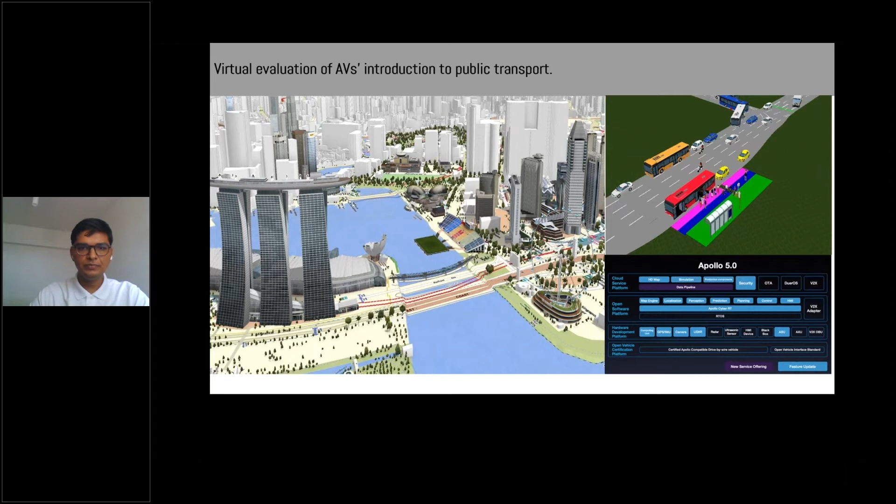The contents of today's presentation will be a brief overview, followed by the research project that I was working on, and then I would talk about the behavior modeling in Vissim, followed by the challenges or requirements for behavior modeling for AVs in Vissim. Then I would talk about the AV behavior with Apollo, how it can be modeled, and what changes we have inculcated in Vissim.

Then I would talk about the proposed design, the details of which I will cover later, followed by results. And then I would give you a future scope of how this research can be extended. So first things first, introduction, a broad view.

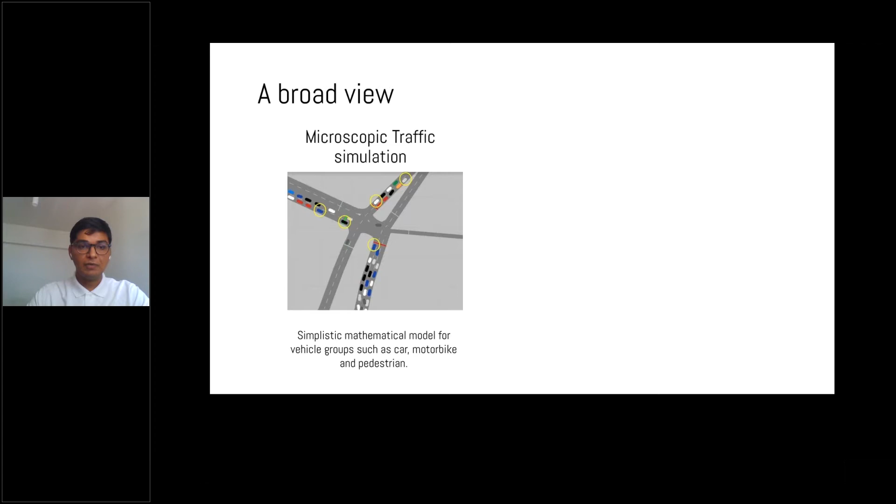Microscopic traffic simulation has a simplistic mathematical model for different vehicle groups such as car, motorbike, and pedestrian. Along with these models for different vehicle groups, it is possible to customize the models for individual vehicles in the simulation. While such modeling is observed in groups, it's also possible individually.

AV simulation, on the other hand, follows complex, detail-rich, modular mathematical models. It uses a modular approach wherein certain modules are handled differently and modeled individually, and they work together as a system.

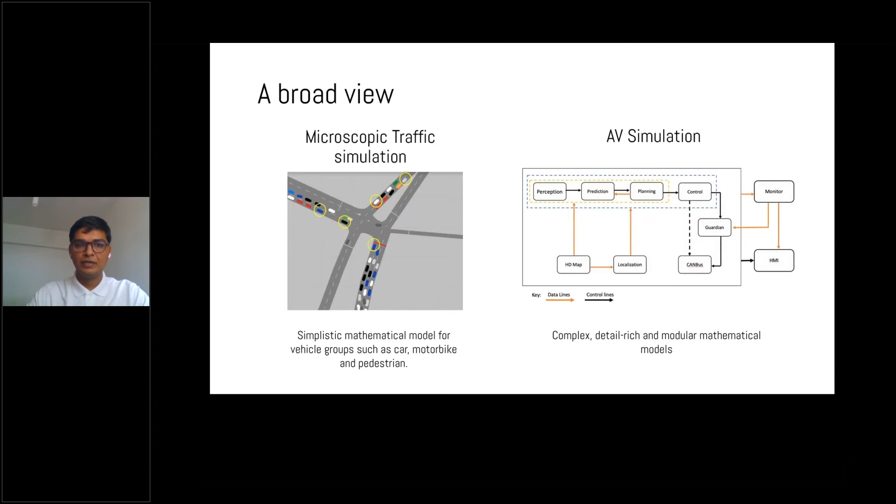So we can see that microscopic traffic simulation and AV simulation model vehicles in a different way. Both can learn a few things from each other. Traffic simulation can assist AV simulation in scenario generation and realistic traffic. Predominantly, AV simulation relies on scenario generation based on certain mathematical equations or from experience. Traffic simulation can assist AV simulation in detecting scenarios which are not traditionally detected from experience or from certain mathematical models.

As I've mentioned earlier, traffic simulation uses simplistic mathematical models, but implementation of AV behavior in traffic simulation can be a challenge. At this point, it's fair to say that traffic simulation can learn from AV simulation about AV behavior. So certain models, either offline or online depending on how you implement them, can enrich traffic simulation when AV behavior, as a lesson learned from AV simulation, is implemented.

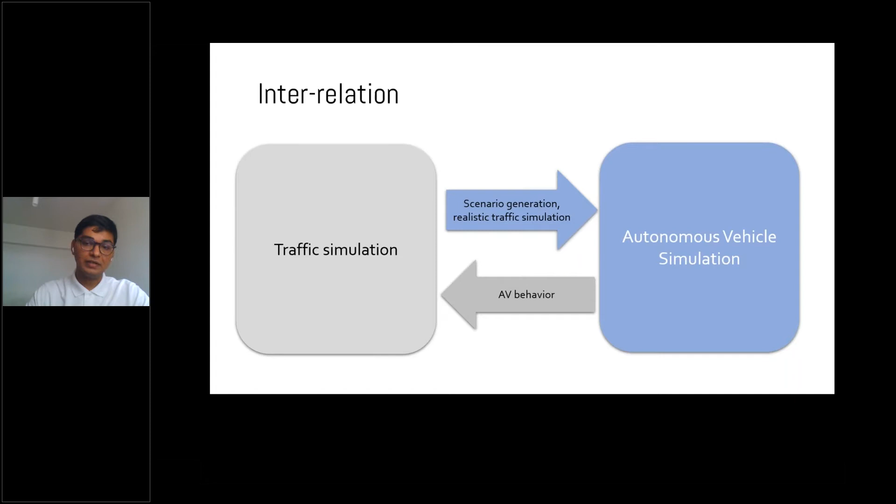The next thing I'm going to talk about is the research project that I was working on. The first part of my research was modeling highly accurate perception and autonomous behavior of the vehicle by using multiple third-party software which are predominantly capable of AV simulation. So the idea was to replicate realistic AV behavior.

Along with the AV behavior, the idea was to replicate realistic traffic behavior, because most of our predominant AV simulation tools do not have realistic traffic. And it can be challenging, depending on which tool you are using.

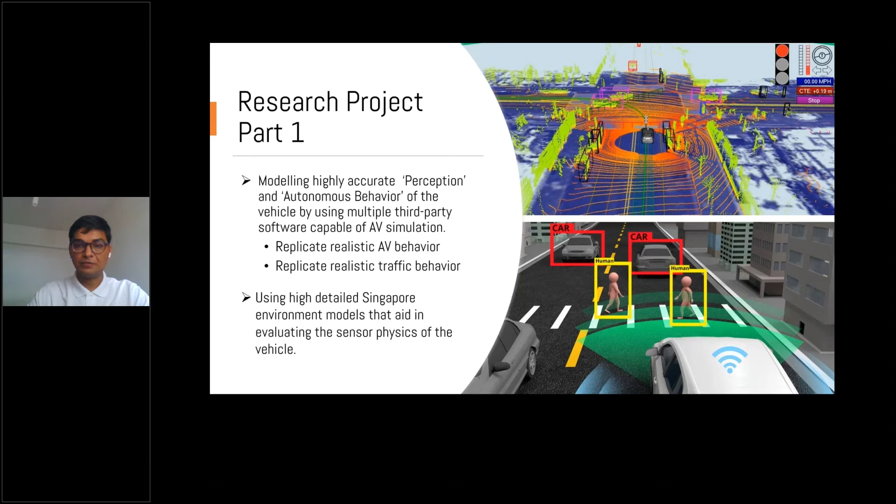Another part was to also concentrate on the environment models that you use in your virtual testing tools. So since our area of interest was in Singapore, we used Singapore environment models, which aid in evaluating sensor physics of the vehicle. The second part of our project was to redesign parking areas and MRT stations. So MRT stations refer to the metro stations, to maximize AV loading or unloading and commuter throughput.

So the idea was, let's say in future, if AVs are deployed for public transport, we want to see how we can integrate the AVs into the existing public transport. So the idea was to propose various bus stop designs. So how do we do that? It is to actually modify the existing bus stops. So the design would include a dedicated stopping point for AVs. So we compared certain advantages and disadvantages of these designs.

Along with that, we implemented these designs in a microscopic traffic simulation model to evaluate, maybe not just to compare, which was the initial idea. The next idea was to evaluate how these designs can benefit if AV is realistic enough. So this part of the project is where I try to understand AV behavior and also the traffic behavior. So this is where I decided to use Vissim. And yes, I'm going to talk about how the behavior is modeled in Vissim before I talk about the AV behavior with Apollo.

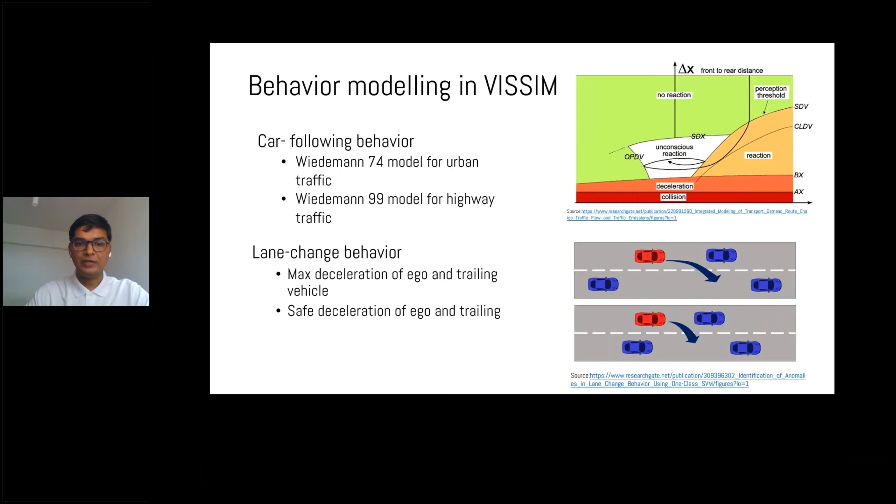And the other behavior is the lane change behavior, which predominantly relies on maximum deceleration of the self vehicle or ego, and the trailing vehicle. Along with the maximum deceleration, safe deceleration is another value which is observed to be quite sensitive when modeling lane change behavior for the ego and the trailing as well. Now that it's clear how to understand the vehicle behavior in Vissim, it's also important to understand how AV behavior can be adjusted to this lane change and car following model in Vissim.

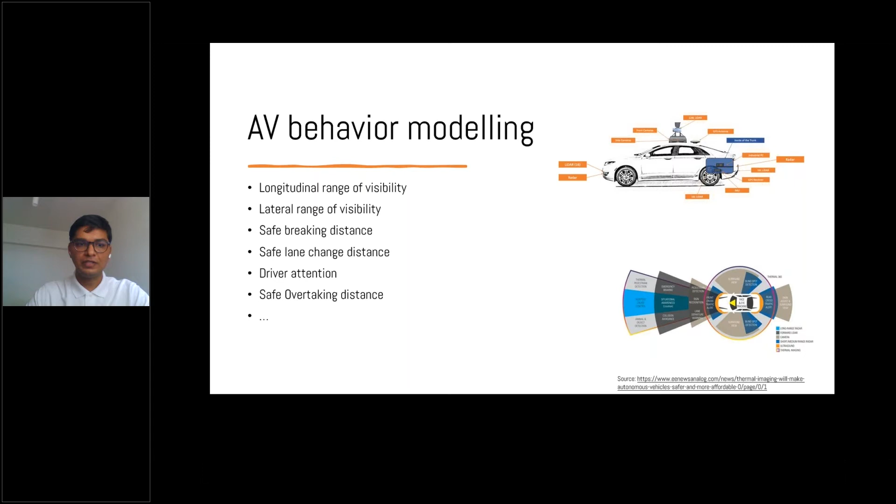For that, we need to understand certain parameters such as longitudinal range of visibility, lateral range of visibility, safe braking distance, safe lane change distance, driver attention, which can be a probability number, safe overtaking distance, so on and so forth. So when all these values are translated for an AV, it depends on what sensor setup the AV is using. The AV has different sensors installed, and each sensor comes with a range. And it's also up to the AV to detect an object, a static or a dynamic object, and react according to that. So all these parameters, when translated to AV, depend on the range of the sensor setup, longitudinal, rear, and lateral, and also the efficiency of the AD stack. How long would it take to detect an object, translate, and then actually react? So it depends on the AD stack.

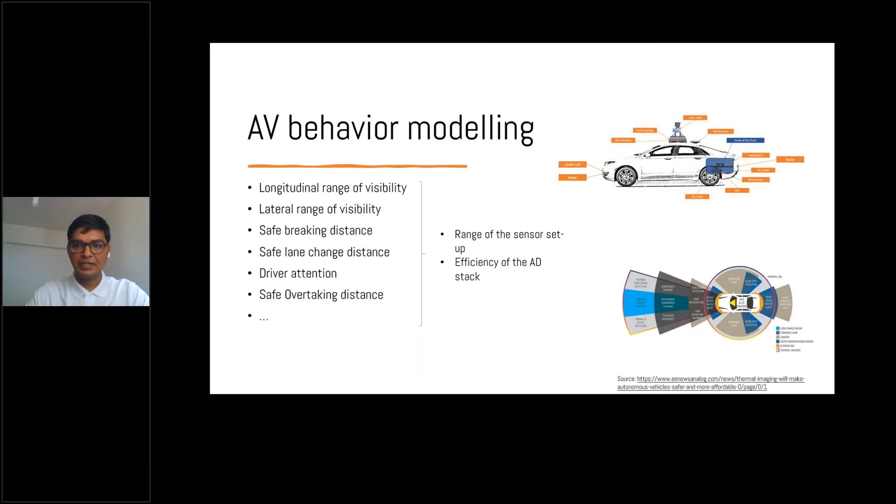And we ran a few sets of experiments to see if these values are followed by the Apollo AV, and certain values such as standstill distance, headway time, and following variation were observed to be slightly different, while certain values such as negative following threshold, positive following threshold, and speed dependency of oscillation were not found to be very sensitive. At least when we changed the values, there was not a significant difference in the Apollo AV, so we did not test further. And certain other values such as standstill acceleration were found to be higher. At least this was the value that we were using for our AV.

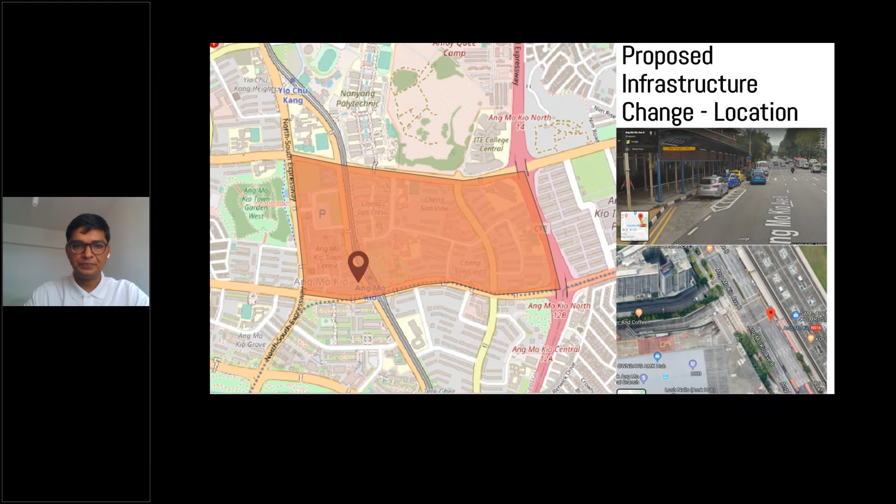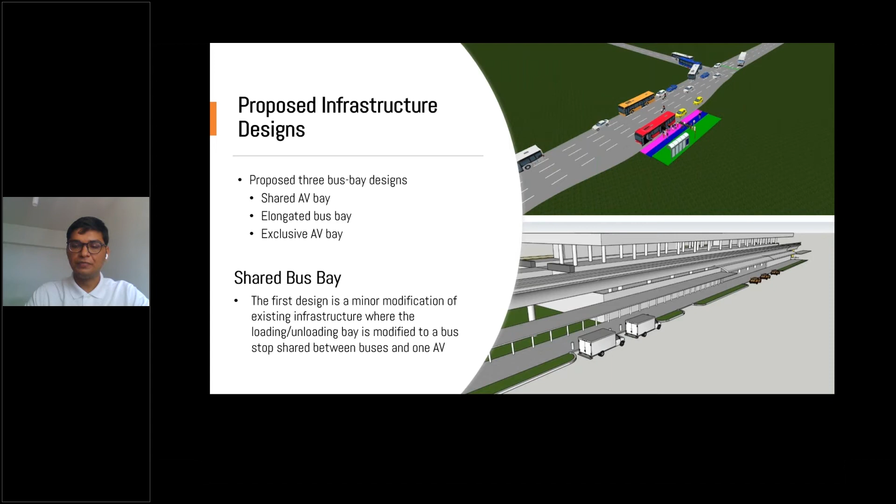So in Vissim, we model our AV as a car, since Vissim does not consider certain parameters such as weight and dynamics. So we used car as our proposed AV, and we modified the loading bay into a bus stop. On the bottom, you can see there's a loading bay. So we modified that into a bus stop and allocated a designated stopping point for AV. Here is the simulation render of the shared AV bay or shared bus bay. You can see this stopping point for AV where people would get down and then get in. And the AV, the car in yellow color, includes the calibrated Apollo parameters.

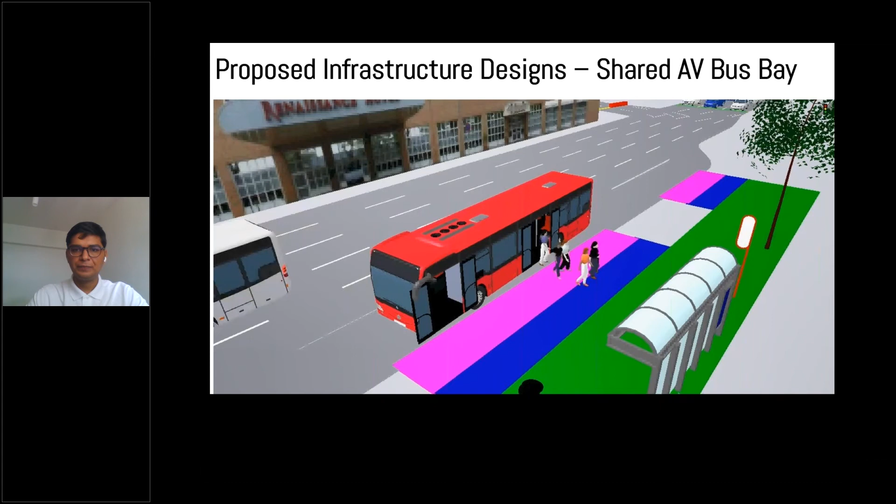Another design is an elongated bus bay. In Singapore, at the bus stops where there is higher traffic, there would be a double bus bay. Our idea was to extend the existing double bus bay and include a dedicated stopping point for AVs. So as you can see, the AV has yellow color and it has a dedicated stopping point in the middle of both the bus stopping points.

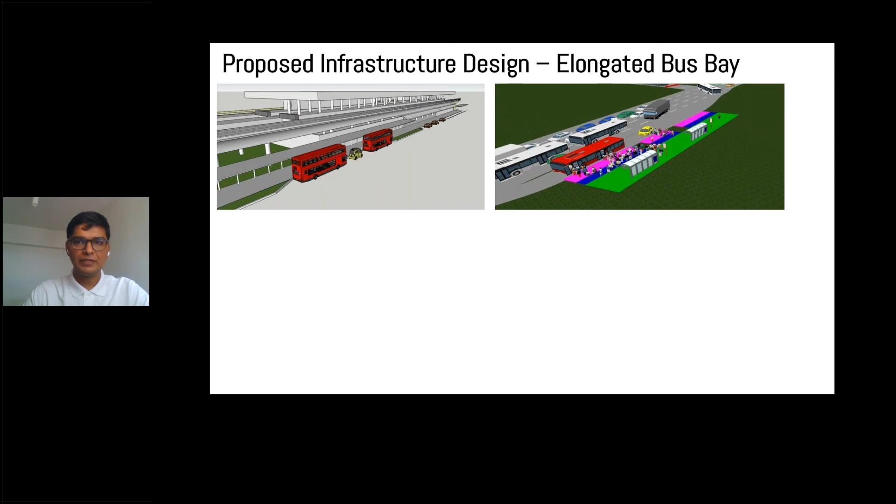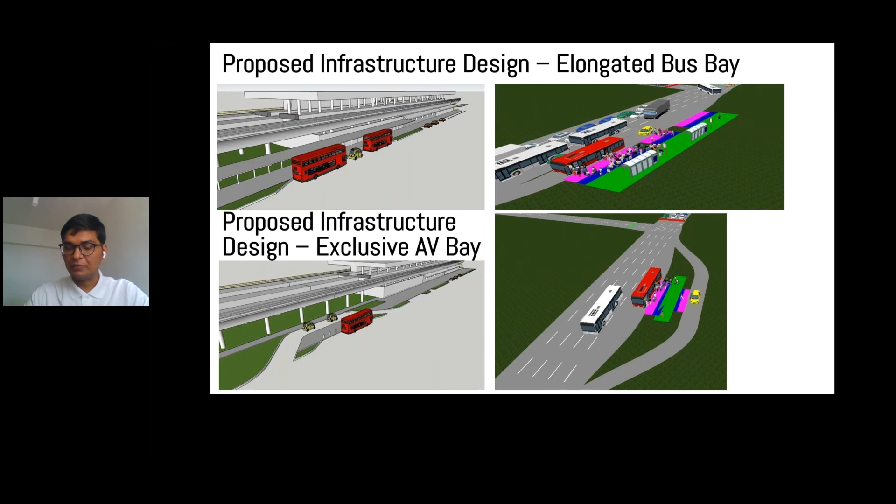That's one idea. Another idea is to have an exclusive AV bay. How does that work? The idea was to have a stopping point physically located behind the bus bay. And this is how it would look like. So there would be a bus, and then there would be an AV stopping point physically located behind. Some simulation render can help you visualize what I am trying to say. So there would be a bus stopping point, and behind that would be an AV stopping point.

So the next step would be the results. How did we try to evaluate? The measures of effectiveness that we used for this research were travel time and queue length. We calculated the travel time for different designs, and also for AVs and cars and other vehicles separately. We realized that the travel time for AVs is different for different designs.

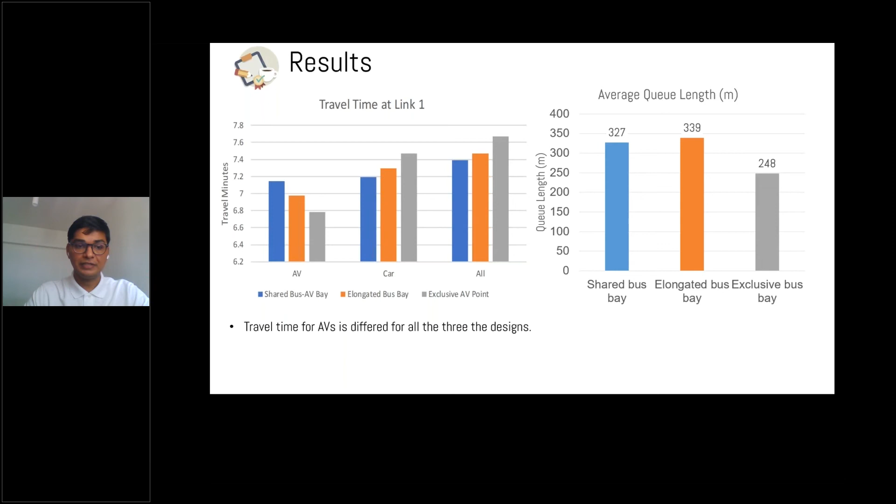AVs take the longest time for the shared AV bus bay, and the exclusive AV bay that I've shared just now has the shortest travel time, which also translated in queue length, where the queue length was the minimum for the exclusive bus bay, while, a bit counterintuitively, the elongated bus bay had the highest queue length. We observed this because there was a queue formed behind the bus stop when there was high traffic.

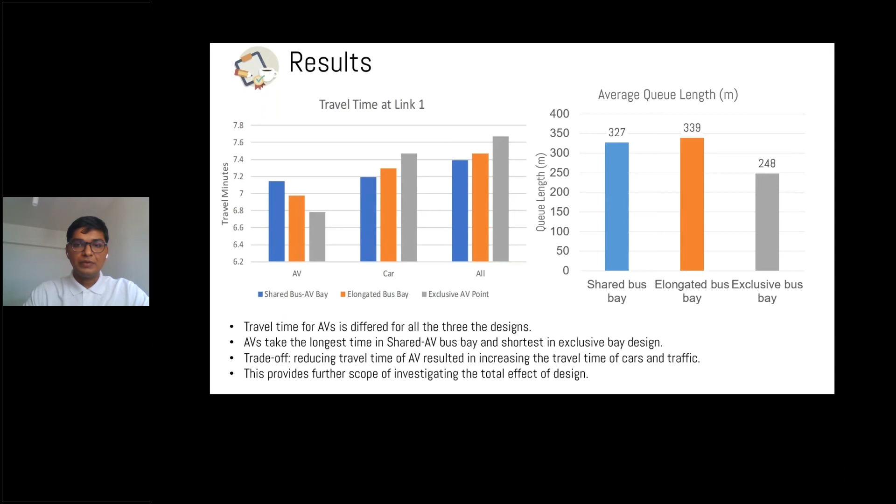So that's the trade-off. As we try to reduce the travel time for AVs with different designs, we observed that the travel time for cars and all the other vehicles, as you can see from the graph on the left, increased. So that is one trade-off that we observed, and we wanted to study this further. So that's for the future scope of our research. So I will talk about that.

So the idea is, since we observed a trade-off where when we try to prioritize AVs and reduce their travel time, the other traffic had a higher travel time, in future we would like to test this in other parts of Singapore. And once we have this consistent observation, then we will try to see it in other parts of the world. We are also interested in the impact of AV behavior on crowded pedestrian scenarios, and also to translate this use case to first mile and last mile applications in transport.

So with that, I would like to thank you all for your time to attend today's presentation, and I look forward to any comments, questions, or clarifications.